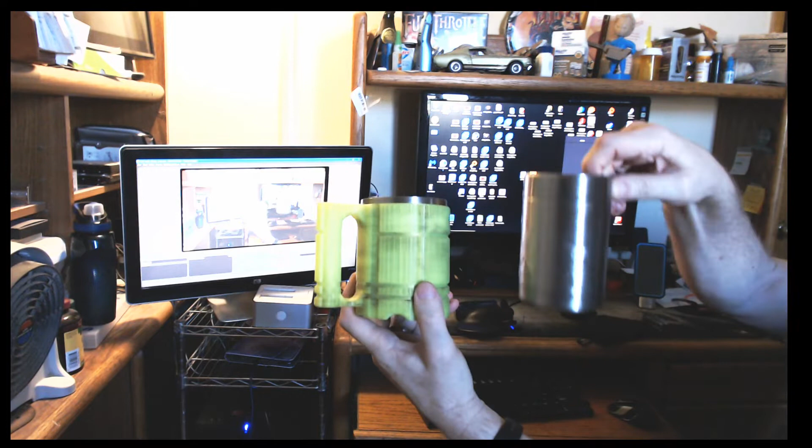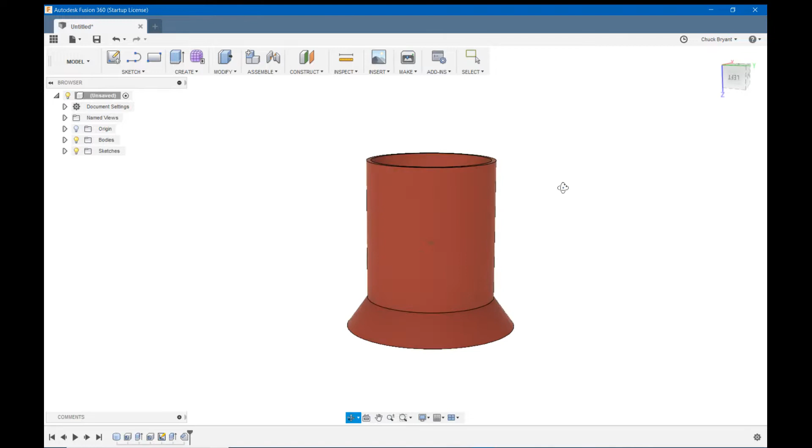Let's pop over to Fusion and get started. This is where we left off last time, our basic initial design. We have an opening in the center where we can shove our can cooler in, and we have a ledge on the bottom that will stop our cooler from going all the way through.

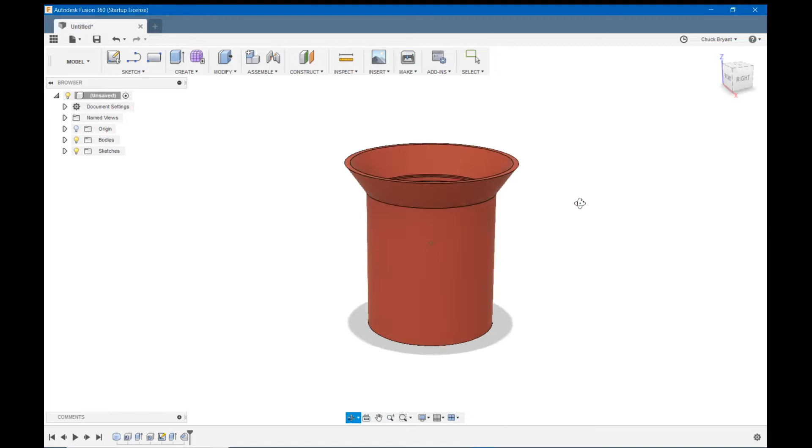It also has a 45-degree angle on it so it will print nice. It's printing in this orientation, and the shadow down here shows our bottom. We have this really nice hollow shell on the bottom at this angle that's going to do two things: make it harder to tip over, and give us a nice anti-wobble bottom for setting down on uneven surfaces like gravel, or my desk, for one.

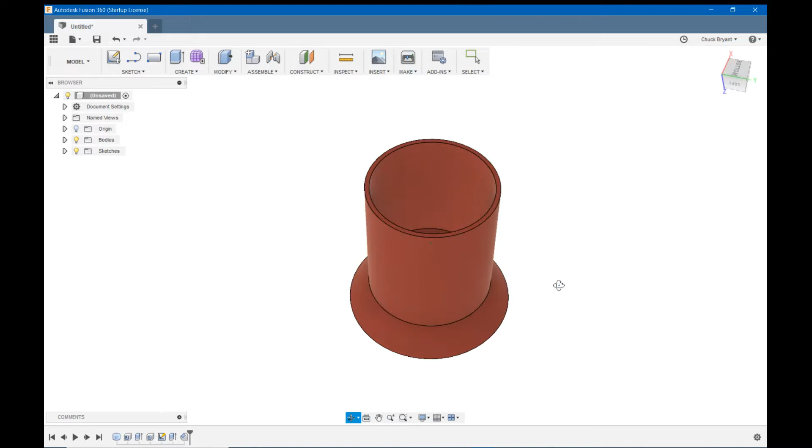But we want a handle, so let's make ourselves a handle. To do that, I am going to start by creating a sketch on this lip. Let's zoom in a little bit.

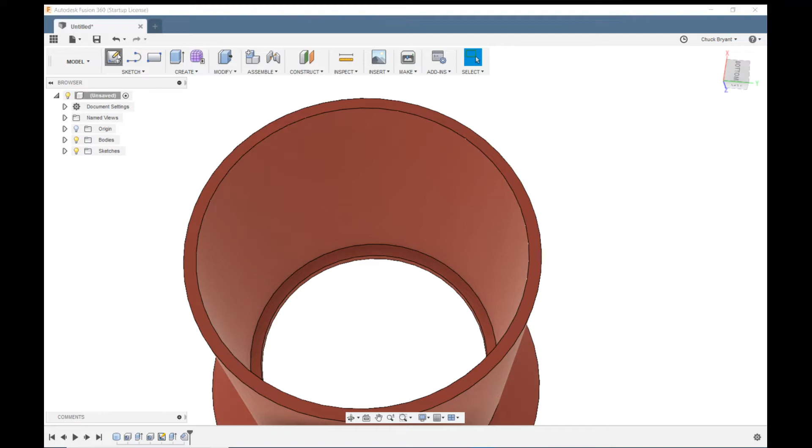Zooming in and out is the middle mouse wheel. Moving from side to side or up or down is the center mouse button, and rotating is the right mouse button. So I'm going to click create a sketch, click my upper lip there, and let's zoom out a little bit.

Let's start by making ourselves a construction line. I'm going to hit L on the keyboard for line, and hang on just a second with me. I'm going to draw my line down here someplace because I'm going to lock it into that center shortly. The length doesn't matter, I just want the angle to be 0 degrees.

So I am going to lock it in. I'll hit escape to get rid of my line tool, and now I am going to click it to highlight it. I'm going to click coincident over here in the sketch palette under constraints, and I am going to click my circle. That's going to lock that line into my center line that intersects the center of this.

Now I'm going to do one more thing. I'm going to click my line to highlight it, and click construction, because as it is now that line would be part of my geometry, and I don't want it as part of my geometry. It's just a drawing aid, a crutch, if you will. So it now changes into a dotted line, and it is now just an aid to help me get things centered and arranged the way I like them.

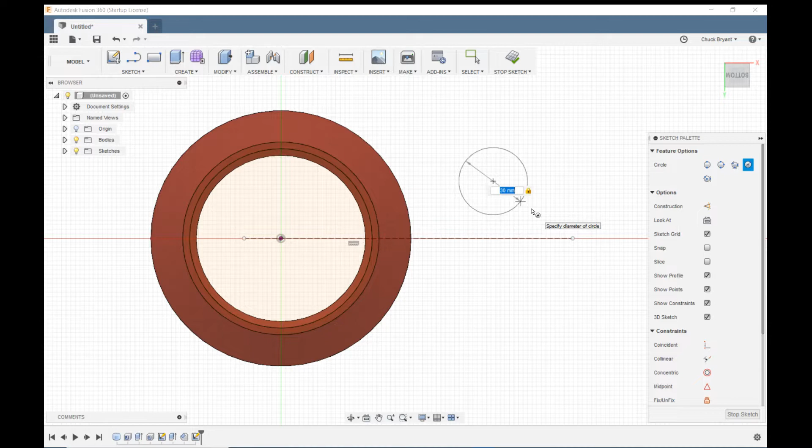So what do we need? We need a handle. I'm going to hit C for center diameter circle. I'm going to draw this out. I figured ahead of time I want that to be 30 millimeters. Hit enter, enter again to lock it in.

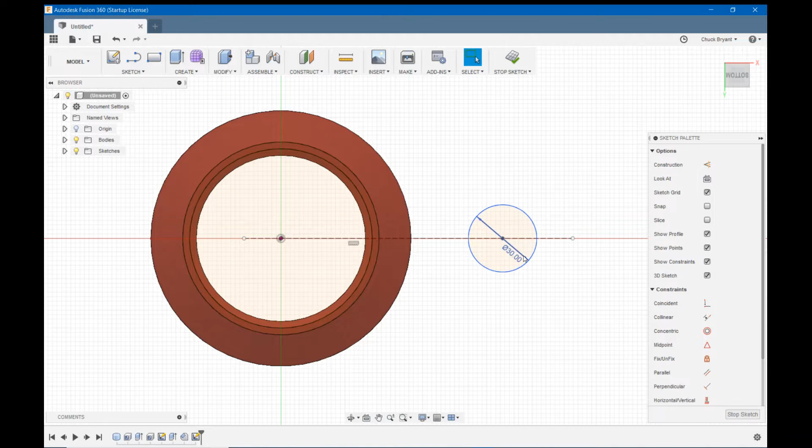Now I want to make this down on my line. I could have done this - let's control Z back a step, and get rid of my circle. I could have done center diameter circle and locked it into my line down here and 30, enter, enter, or I could draw it out into space out here and then use the coincident constraint to lock it onto the line. But now it's locked onto my line because I've made it on that line. I can move it in and out, but I can't move it off that line.

I want it to be a distance, so I have decided that I want a 20 millimeter hole through the handle to put my fingers through. I'm kind of adding stuff up here, coming out 40 millimeters from the center - actually it's 43, but I'm not going to worry about that - a 20 millimeter hole, and to the edge of this is 60.

I don't want to make it 60. 60 is going to be awful tight. So let's make it 65.

I'm going to hit D for dimension. I'm going to click the center of my circle here, and the center of this circle. Oop, I missed something. There we go. Let's make this 65. Enter, enter. That doesn't really look like much space, but I'm going to cut some of that out with the hole for my fingers.

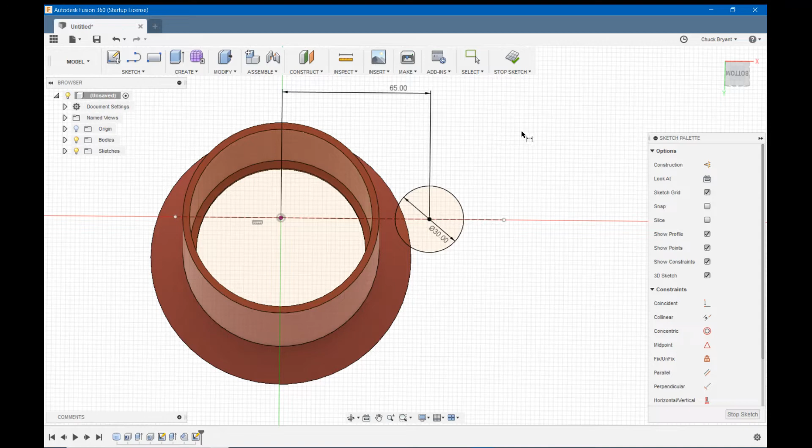So that changed my view on me. Let's come back up here and say perspective with ortho faces. Now I can't move this circle in or out, and I can't move it off of that line. So escape to get rid of my dimension tool.

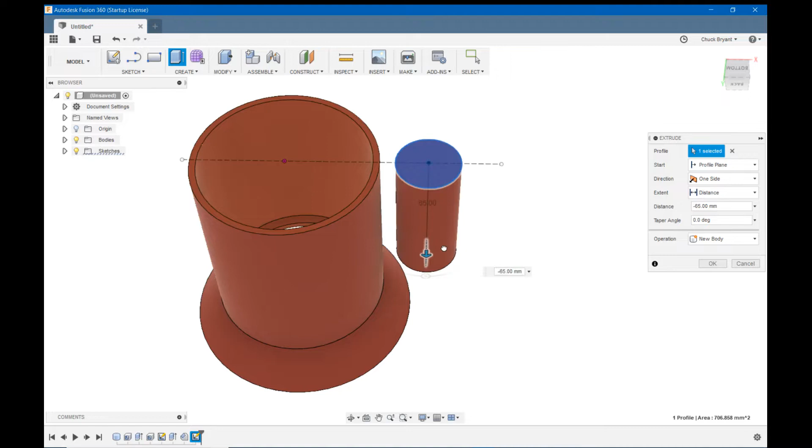Let's click create and extrude. Let's click our circle, and let's move our circle down. I know I want it 95 because I want the whole length of the can part of this. Oops, what happened? Where did it go? I lost it completely, didn't I?

Let's do Control Z, get back. Oops, I really undid this, didn't I? Let's change this back to my, what did I say, 65? I don't know what happened there, but...

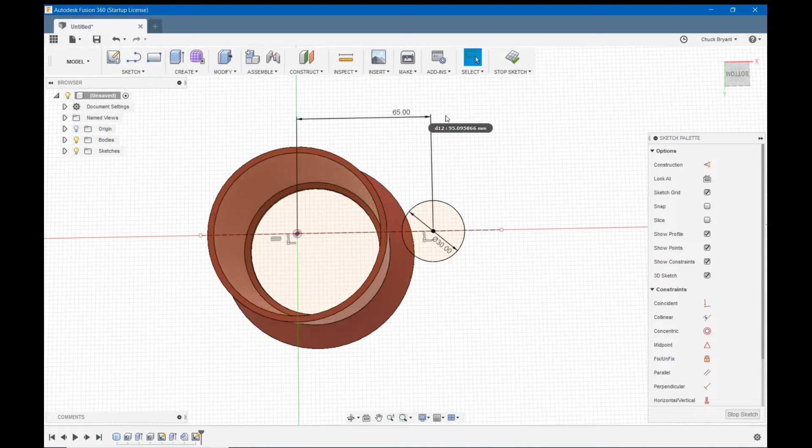So we're going to extrude. I hit E instead of using the menu. I want to extrude that, and I want to come 95. There we go, right there, and okay. So there's my handle. I'm not sure about that 65 millimeters, but we can revisit that.

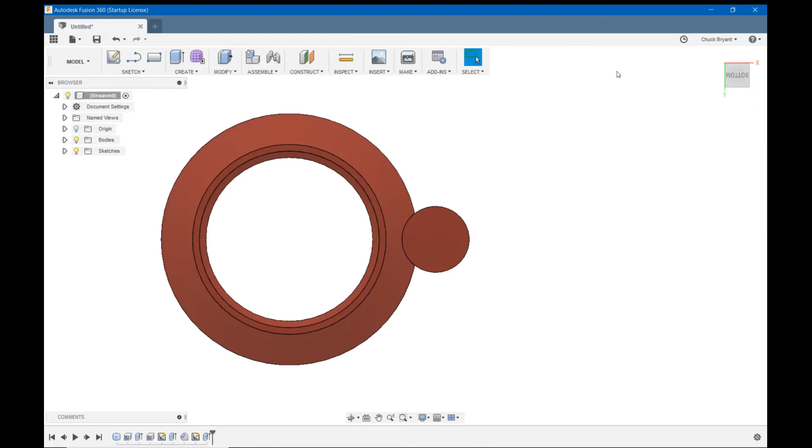So now I need to attach the handle, don't I? So to do that, let's make another sketch. I could come back and use that previous sketch, but I kind of like to do everything in individual steps. I find that an individual step that only has one construction part of it is easier to come back and change later if I need to.

So create a sketch. I'm just going to use the top surface of the handle because it is on the same plane with the very top of our cup. And I'm going to make another construction line for myself too. I could bring that other one back, but it's pretty easy to make another one.

There's my line. Highlight it. Click coincident. Click my center circle. It's now locked into the center. Click to highlight it again and click construction to make it a construction line.

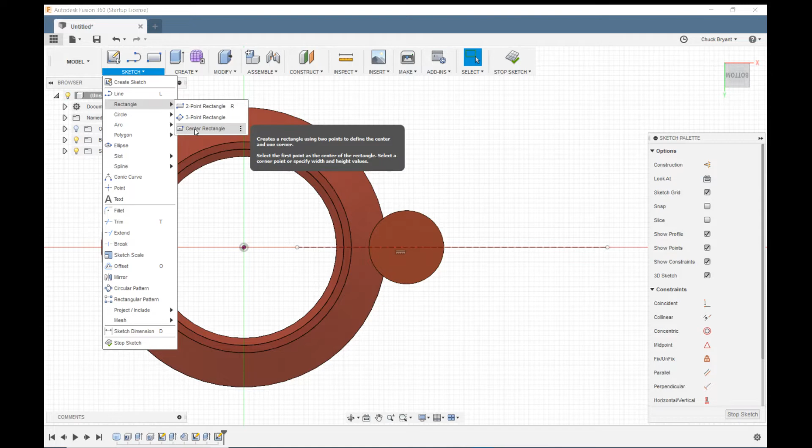So now what I think I'm going to do, what's the simplest way to do this? Probably a 2-point rectangle. So I'm going to come to sketch and rectangle and 2-point rectangle. You know what? I think I've changed my mind. Let's go up to sketch, rectangle, and let's try a center rectangle. That might save us a step.

So I'm going to lock into my center construction line, because after all, that's probably why I made it. And I'm going to make myself this rectangle. I don't really care about how big it is right now. Let's just click it to make it.

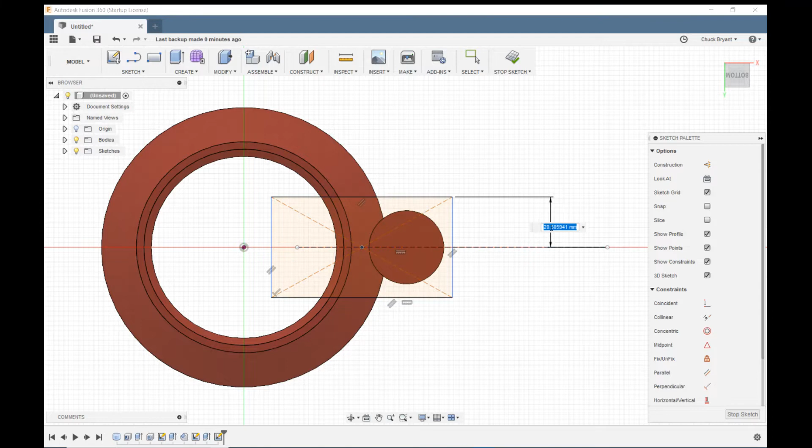Let's hit escape to get rid of our rectangle tool. Let's bring up D for dimension. Let's click our dimension line here and our center line. And we're going to make that dimension half of the diameter of our circle, which was, what was it? It was 30 millimeters, so we're going to make it 15. And since this is a center rectangle, it's going to automatically make the other side of it 15 as well.

And there it is. So now what I'm going to have to do, I want to extrude this down to make our piece down here. But to do that, I'm probably going to have to move this line in. Oops, move this line of the rectangle in until it just does that. So let's see how that works for us.

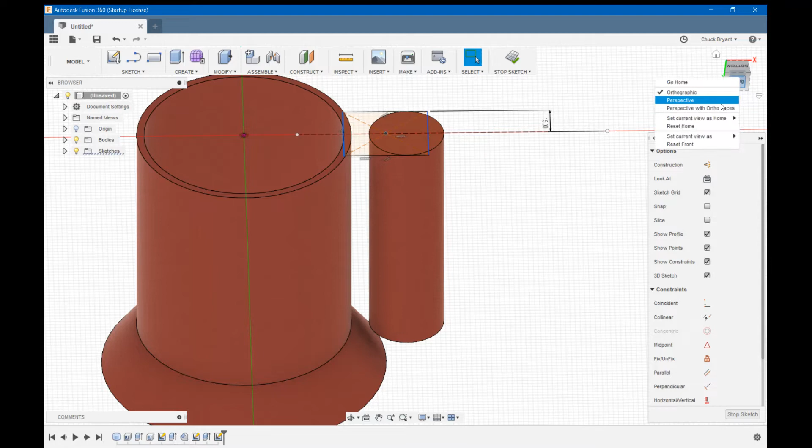And again, it changed my view. So back over here to perspective with ortho faces. So let's click on E to extrude. Let's click this part here and let's pull it down.

Now notice as I pull down, it's making a cut. I don't want it to be a cut. And the reason it's a cut, and the reason this wasn't a cut - the handle wasn't a cut because it didn't intersect anything. This intersects both my... well, it doesn't intersect my handle, but it intersects my cup.

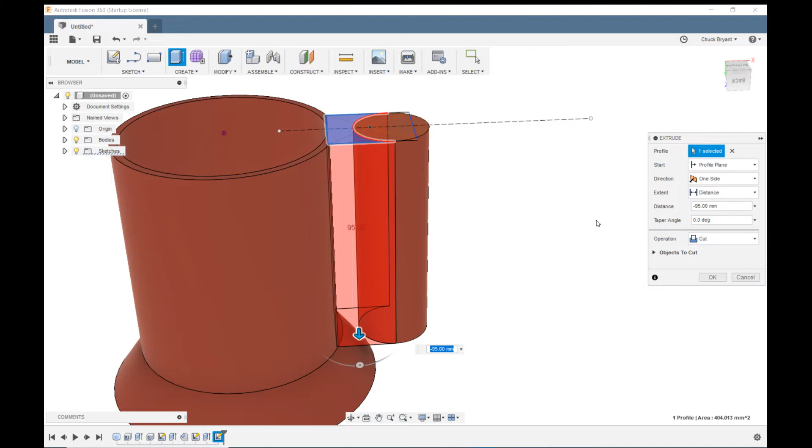So I can't make the 95 minus plus 95, or it would draw it up above. So I need to come over here to my extrude toolbox and I need to change cut to join. And there, and I'm going to say okay.

And there's my handle. So I need holes for my fingers, and I need to make this a little bit smoother overall. So let's do those things right now.

Let's make the hole for the handle, and then we'll probably stop there because I'm pushing 10 minutes.

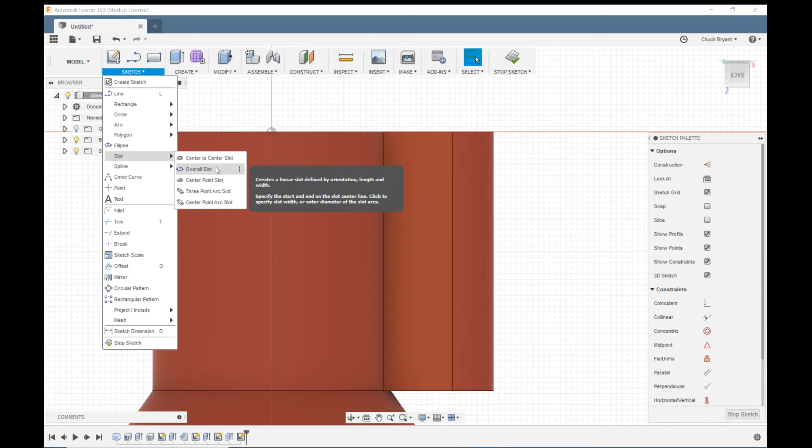Let's try it. I'm going to click on slot, and overall slot. I could draw an arc slot or even a whole circle slot if I wanted, but I'm going to click overall slot, and I'm just going to kind of guesstimate this to begin with. I'm going to click up there, come down to around there, and now come out.

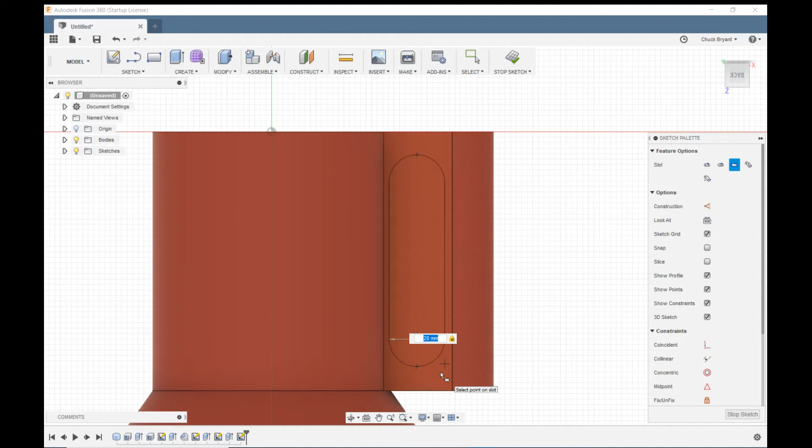And I know I want 20 millimeters. And there we go. It turns out my 65 is looking pretty good, but I don't think so. Let's come out 20 millimeters. There's my 20 millimeter slot.

Let's dimension it. I'm going to hit D for dimension. I'm going to first click this line, then this line, and come up. I've been going with 3, so let's stay with 3. And let's do the same for this - D for dimension, here to here.

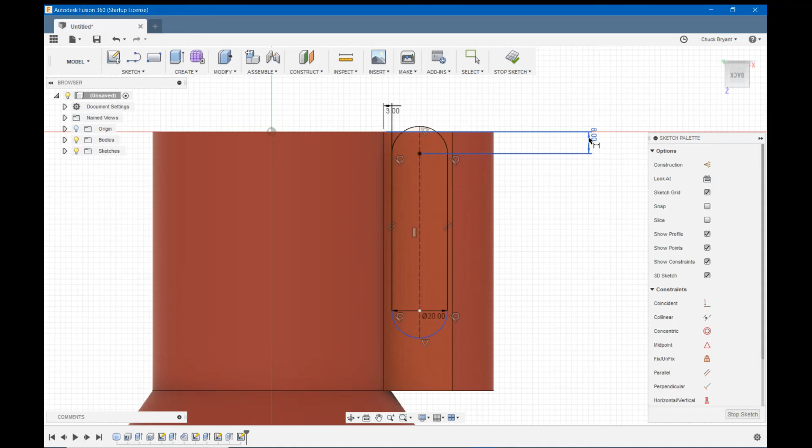20 millimeters, 10, 5. Let's try 8. 8 millimeters, enter. Oh, that didn't work out at all, did it? All right, I don't know what I did wrong. Let's try 18. Did I leave a 1 out?

18's bigger than what I want, so let's try about half of that. Let's try 10, see what 10 gives me. 10's not enough either. What's going on here? How come I can't get something I want? Let's try 15. Yeah, 15's good. I like 15. So let's do it again down here, here to here, and 15.

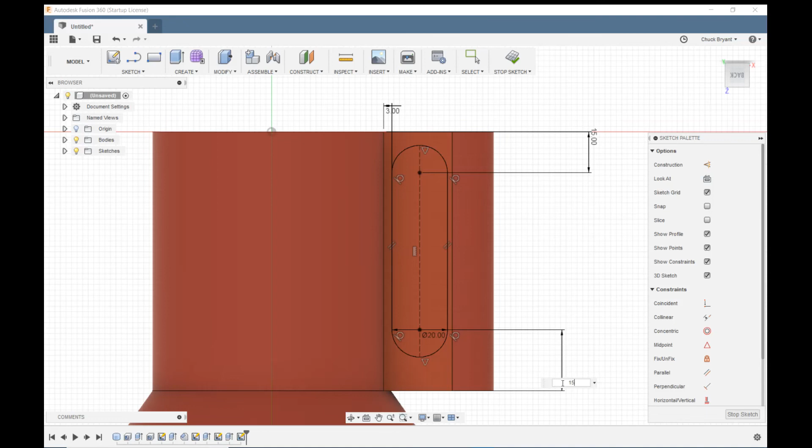Okay, so that has done that, but now I don't really - I want more of a hole. I'm going to put a hole down here, and that hole is going to cause me a problem with that. So I'm going to stop this sketch here, and go back and find the sketch where I dimensioned my handle out from my cup. And I think that is this sketch here.

Am I right? I'm going to edit that sketch, and I'm going to up my 65 to 75. I'm going to give myself another 10 millimeters there, and let's say stop sketch.

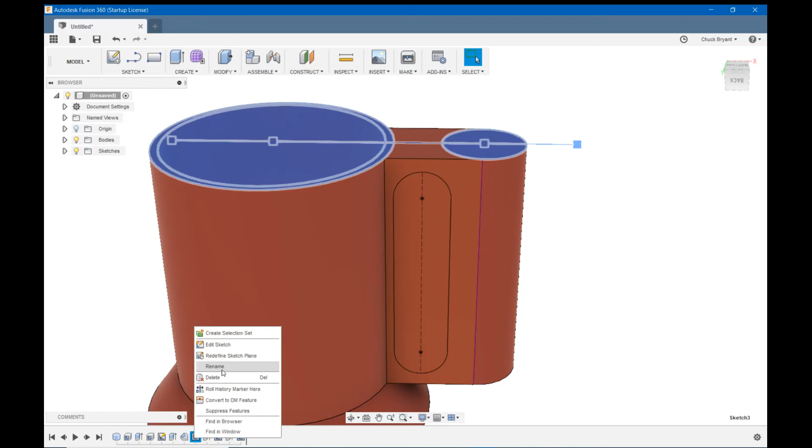I think that was a little bit much. So let's go back to that sketch one more time. Edit sketch, and let's change the 75 to 70. And stop sketch - and that looks better.

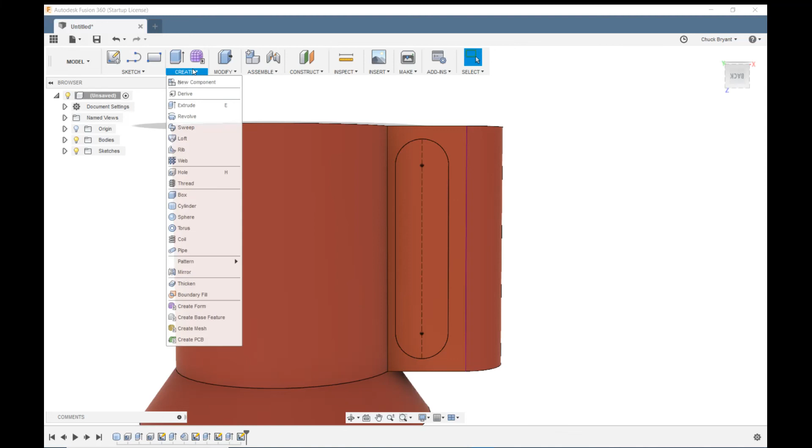So let's put the hole here through for our handle. We're going to come to create and extrude. We're going to click on there. I'm not going to be overly fancy about it - I'm just going to drag it out there as a cut and say OK. And let's zoom this out. There is basically our completed unit.

We're still going to put some embellishments on it, and I think we'll do that in the next video. We'll put those on it, we'll save it, put it over to Cura, and we will print it and come back and see how well it works.